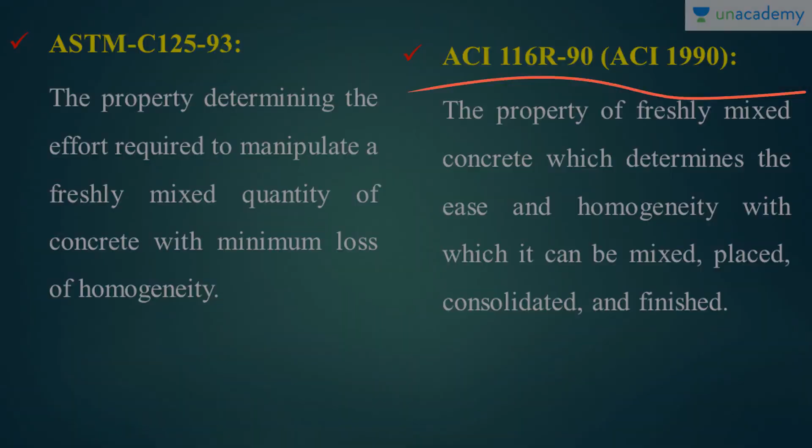Now let's move on to some of the other points. Here we are going to do a standard laboratory test which is universally accepted, so it has to be followed by some specific guidelines provided by a recognized institution. Here we follow the code book provided by Indian Standards, that is IS 1199, 1959.

It's a very fancy number, 1199. I hope it's easy to remember for you. And also in the USA, the code book they follow is ASTM-C 143. And in Europe, there is another code book.

So the result we obtain from this experiment, or this test, is the slump value, in millimeters. So this is a Viva question for you - these three will definitely be asked.

As I said before, this is the most important test to measure the workability of concrete, and one of the most universally accepted tests for fresh concrete. Because of its low maintenance and low cost, and because of its immediate results, this test has been in implementation since 1922. So the entire concrete industry or civil engineering world has been using this test since 1922 - please have that respect for this test.

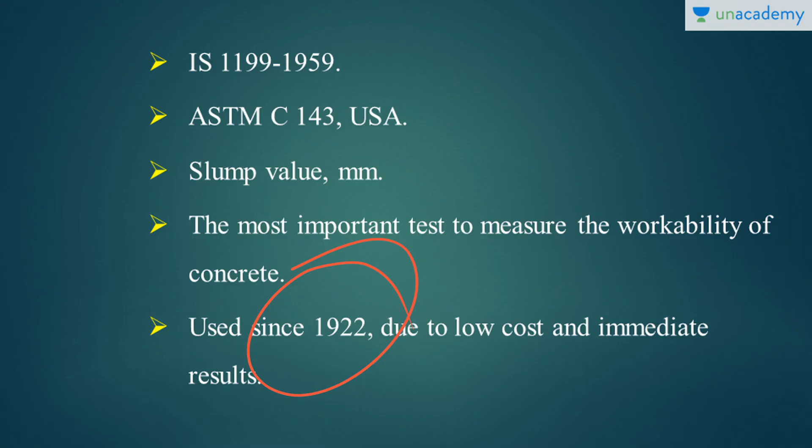Now let's move on to the laboratory experiments or the equipment that we need. Let's see what apparatus is required.

First and foremost, one is the slump cone mold, which has a certain outer diameter. We have the slump cone mold, the tamping rod, a non-porous base plate, and a steel roller. The slump cone mold is a mold in the form of a cone, which has a frustum on top - meaning the cone will not be complete. There will be a small cutting, a small opening, on the top of the cone.

So the base diameter of the cone will be 20 centimeters. Top diameter will be 10 centimeters. And the total height of the cone will be 30 centimeters.

Next we have the tamping rod, which has a diameter of 16 mm and length of 60 centimeters. And also we have a non-porous base plate, which acts as a base for the experiment, and also we have a steel ruler to find the slump value.

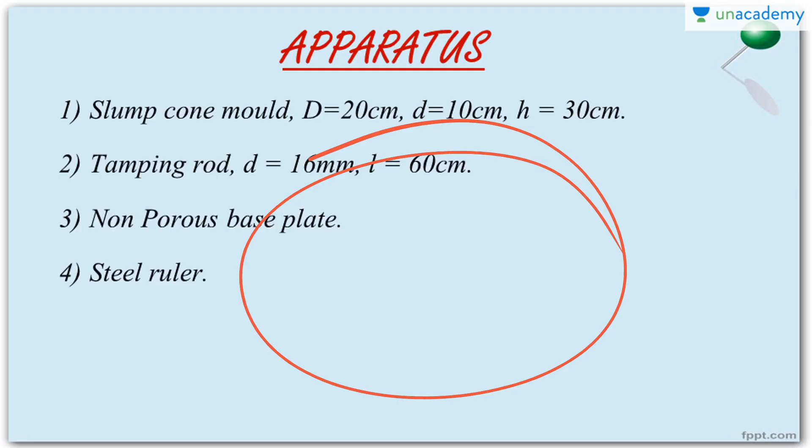Now let's move on to the procedure. This is actually a very simple one. This can be done both in the labs and on site, and it's very easy to do. It's very low maintenance and low cost. So because of all these advantages, this is one of the most accepted tests in the world.

Let's see what the procedure for the test is. First and foremost, we have to clean the internal surface of the mold and apply oil to it. The internal surface of the mold has to be cleaned thoroughly so that there are no particles from the previous experiment. We must also apply oil so that the concrete will slip down easily, or we can easily remove the mold from the concrete mix.

Now, we have cleaned the mold and oiled it inside. Next, place the mold on the base plate and lock it. Now fill the mold with concrete, layer by layer.

Approximately 4 layers. Each layer will have almost equal length or height. So fill the concrete mold with 4 approximately equal layers.

By filling equal layers, each layer must be provided with 25 strokes of compaction. Each layer has to be compacted using the tamping rod by providing 25 strokes. So each layer is placed, stroked, and compacted.

Now another layer comes over the previous layer. While compacting, the rod has to penetrate through the fresh layer into the layer behind it. The tamping rod has to go through the entire layers. That's how you provide the compaction.

Now remove the excess concrete on top and level the top. Clean and level it. Sometimes there will be mortar or water leaking through the gap between the mold and the base plate, so clean that as well.

Now we are ready for the experiment. Raise the mold from the setup immediately and slowly. The mold alone has to come up, and remove it completely.

So we have a slump over there, a lump of concrete mix. Now measure the difference between the height of the mold, the top height of the mold, and the top height of the concrete mix. That height difference is the slump value.

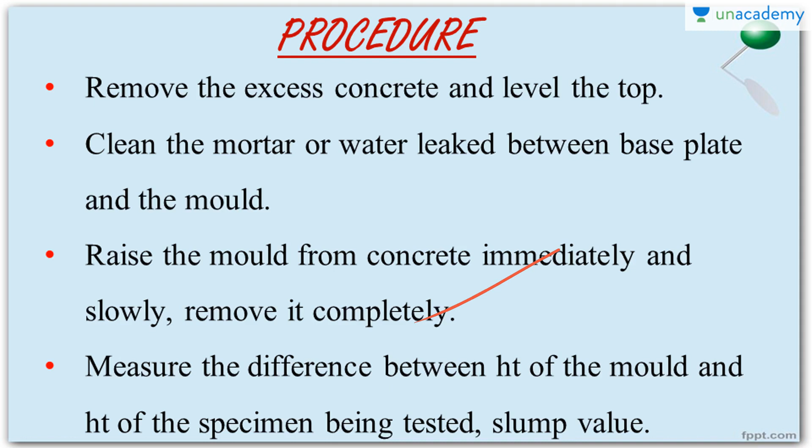Now let's move on to the inferences, or what we see from the slump cone test. From a lot of trial and error methods, they have concluded that there will be almost 4 types of slumps that can be formed. First one is a true slump, second is a zero slump, and we have a collapse slump and a shear slump.

This is the type of slump we need to obtain while we do a slump cone test, if the concrete needs to be perfect for the construction or for whatever use you're going to do. This is the only slump that can be measured in the test. Only when the true slump is obtained must we measure the slump.

Now the next type of slump is the zero slump. That means it will be in the shape of that cone. It will be too tight. This type of slump indicates that the concrete mix has a low water cement ratio. It results in a very dry mix. These types of concretes are usually used in road constructions.

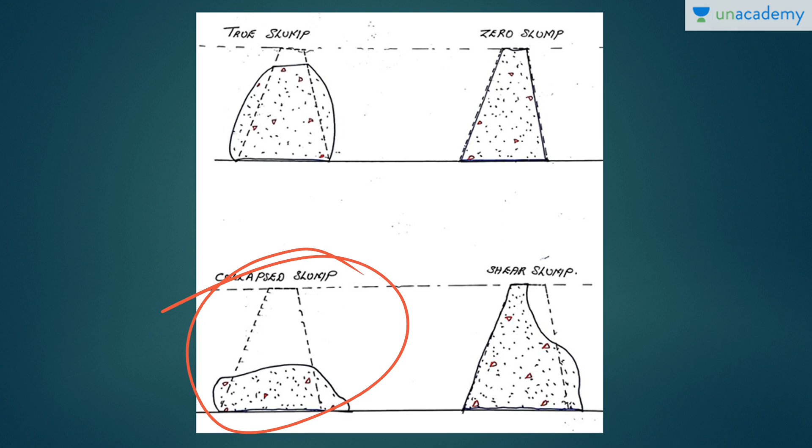For this type of slump, or this type of concrete mix which is highly workable and which has very high water content, the slump cone test is not for this.

The next one is a shear slump. Shear slump looks something like this. See the shape? It's quite sheared away. This indicates a result that is incomplete, meaning the mixing is not complete and the mixture is not in a complete form, and hence the concrete has to be retested again by providing the required adjustments.

So now, when the shear slump is obtained, the concrete mix is not desirable. It has to be retested by providing adequate adjustments.

So what are the remedies for it? First, we must adjust the mix proportions in the concrete content. Also, sometimes the size, properties, and types of various aggregates inside the concrete mix can also affect these kinds of slump tests.

Also, sometimes if the cement content is low, the shear slump can be obtained. So these are some of the small remedies we can apply when there is a huge amount of variation in the slump value.

So this is the slump cone test. I hope you understand how the test is done. The test is very simple: we have to clean the mold inside, put the oil inside, fill the mold layer by layer, each layer approximately the same length. Now compact it, providing compaction for each layer by 25 strokes with the help of a tamping rod. The tamping rod has to go deep; it has to touch the base.

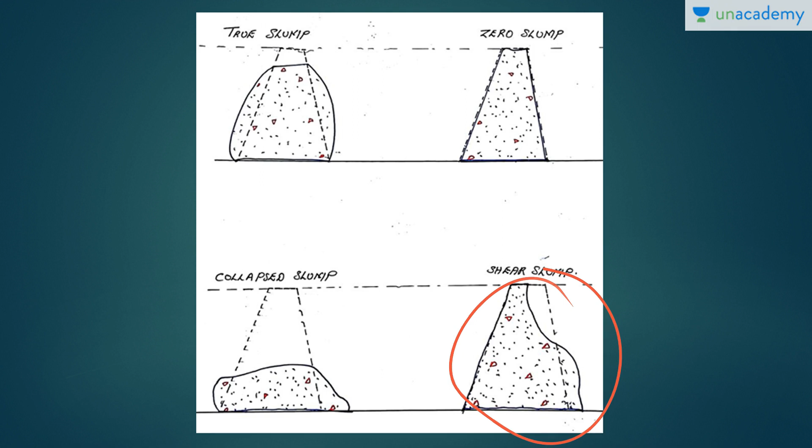That's all for today. This is a very simple experiment, but a very, very important one. Thank you for listening.